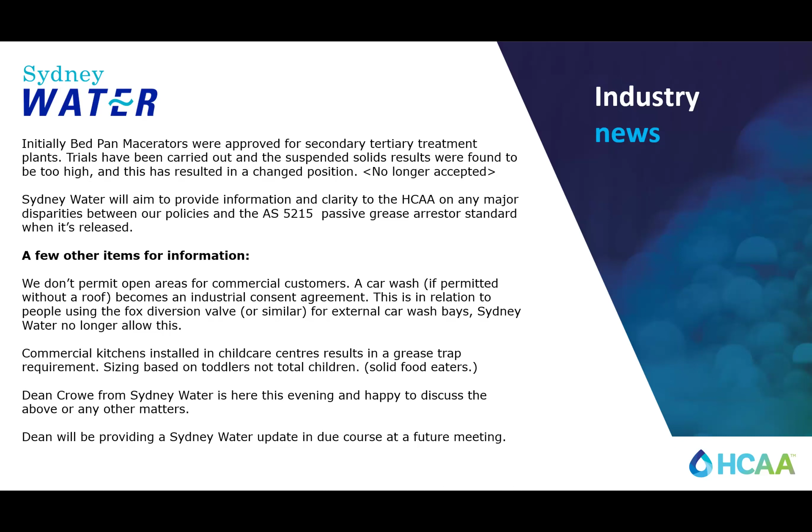Sydney Water are going to do a presentation, probably the next one - that's right, yeah. So watch this space, and you're here tonight as well to talk about it, so if anyone's got concerns, just jump across there.

Brendan's going to do a bit of a presentation tonight on the water demand calculator, but we just want to quickly touch upon this so everyone knows. We've got 4 water meters installed in the cold water service for apartment blocks, and that's been running for 4 years. We've also got 1 hot water meter, and that's been running for 1 year. What we're going to do is just complete that project.

We're going to buy 3 more meters and install them in the remaining apartments, leave them for 4 weeks to get that data, and that will complete the project. Then Brendan can take all that away and we'll publish what we're going to do there. That's in July, and it'll run for 4 weeks. Then in August, we're going to relocate all of those 8 meters to 4 hospitals - that's the next part of the project. So it's just getting bigger and better, and we're going to get real-time data on that. Just wanted to share those thoughts.

Tonight, well, not right now, but in about 20 minutes - ICC has a live event with speakers from Australia, Germany, New Zealand, and the United States. One of the speakers, Tom, is incidentally in Canada, to make things even more complicated. They're going to be talking about pretty much all the stuff we've been doing about global pipe sizing and what happens in different countries. It'll be very interesting, but it clashes with tonight, so I don't think anybody will be tuning in for that. But I imagine it'll be recorded, so we'll send a link out to that after.

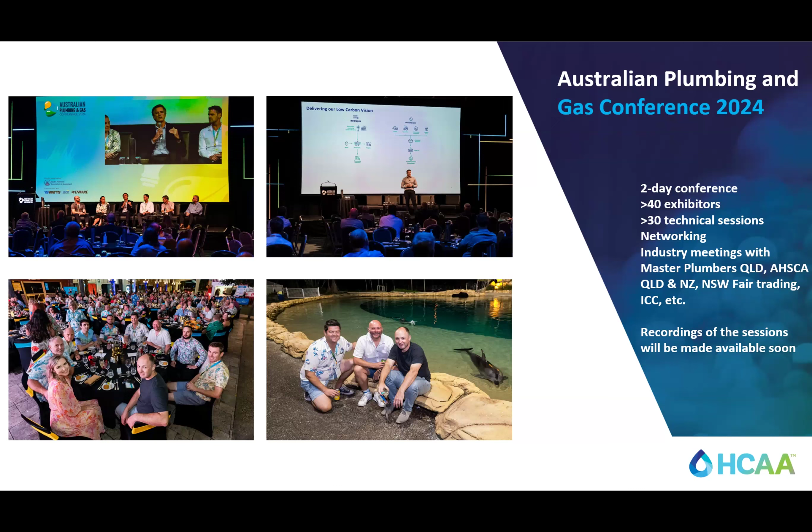We're not going to hold a meeting in May in Sydney, but we will hold meetings in Tassie, South Australia, and Canberra. But we're going to concentrate on this meeting.

It's going to be a celebration of our 5 years as the HCAA, and 50 years as an organisation. We're holding it down at the Cruise Bar, right where the terminal is, where the big cruise ships come up, on the corner of the rocks and Circular Quay. It's a fabulous place - Stephen, Matt, and Em's done a fabulous job organising that, so maybe give them a round of applause.

That evening itself will be just a bit of fun. There's going to be a band, fingers crossed, that's locked in - I think I saw them walking in earlier. That's going to be happening.

We're also going to do a couple of awards - some fun awards, but also some real-time awards about people and projects. It's all about celebrating. We used to do the rep of the year kind of award, but we want to advance it a bit better and make things more organized. It's going to be pretty good.

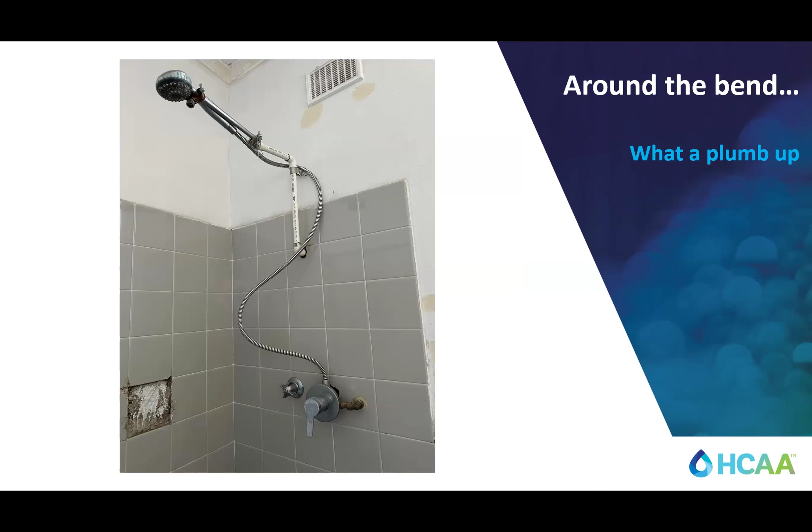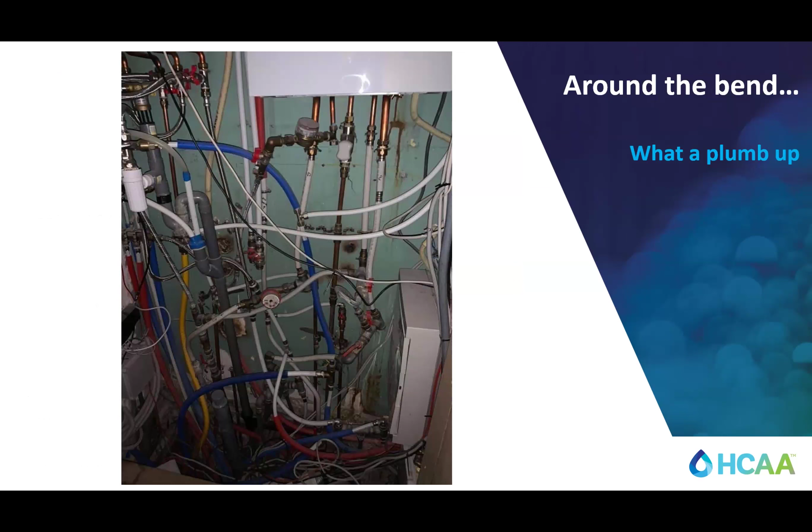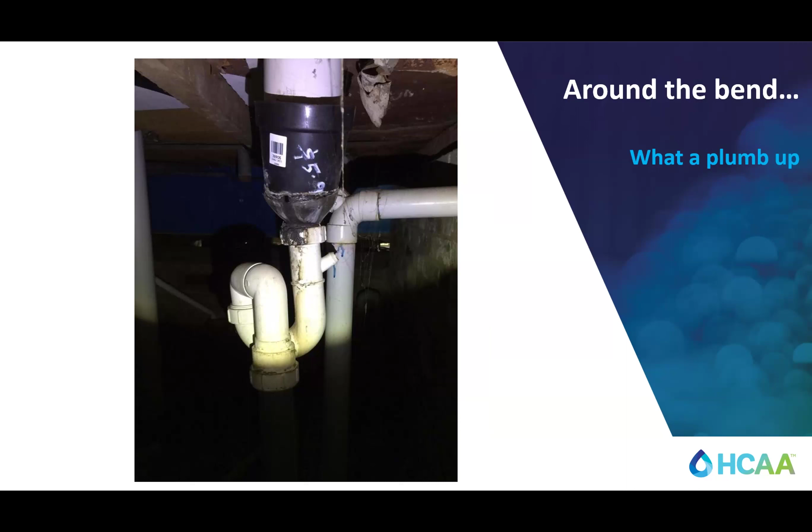Alright, a little bit of fun. We've got a couple of dodgy pictures here. Pretty reasonable, right? What do you reckon? That's a real situation. I've actually seen this quite a few times, I'm sure a lot of people have. It's bizarre, I've no idea what's going on there. How do you even use that, right?

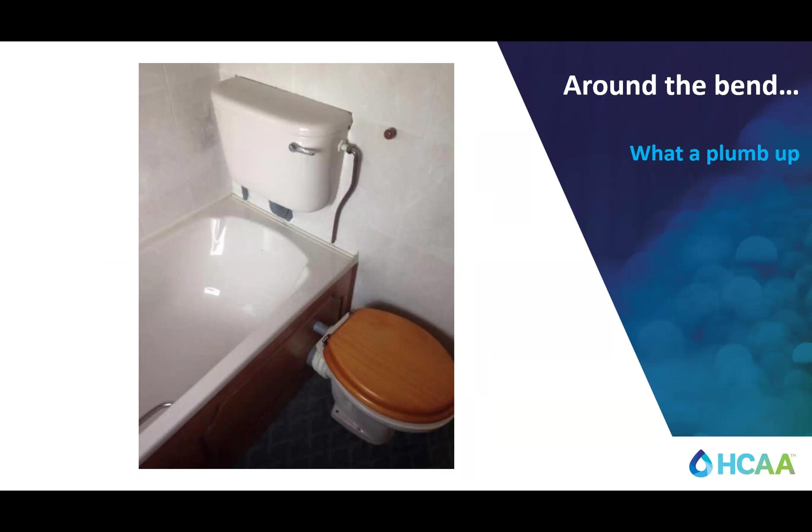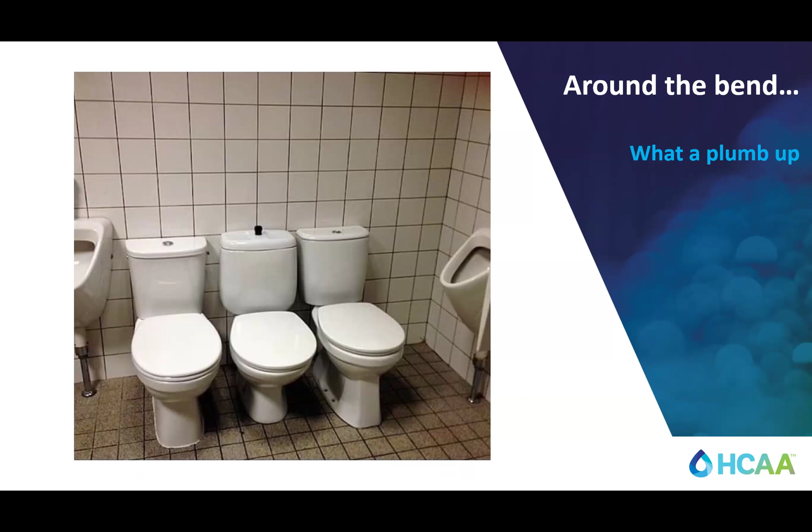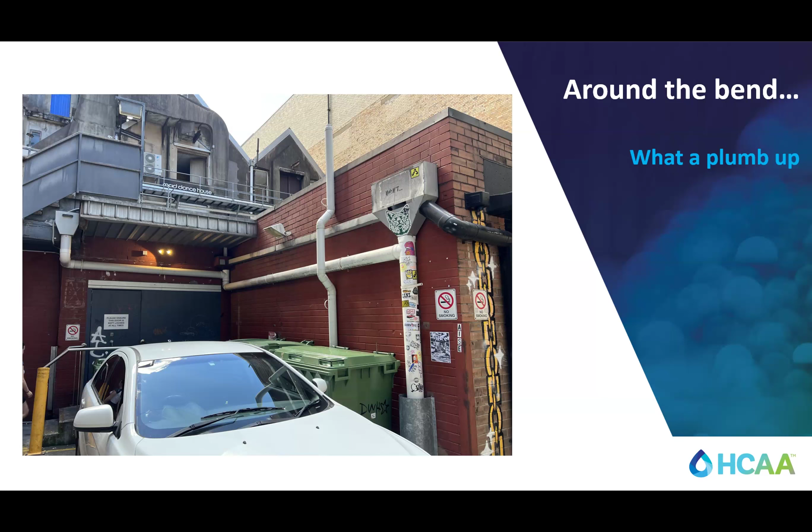It's mental, isn't it? Alright, that's the end of the committee report.

Everyone's had their first meal, yeah? Alright, we're going to get everyone on their feet - it wouldn't be an HCAA meeting without heads or tails. Everyone get on their feet please, we'll rattle through this, we've got a couple of prizes so you can select. How do you pronounce this - a compendium. Your life is not complete unless you've got a compendium, this is an HCAA compendium special. Alright, true or false, it's heads or tails, everyone knows how to play. No cheating - if anyone's still sitting after this, it's going to be ridiculous.

The HCAA president, Paul Angus, who's me, began his career as a plumber. True or false? Heads is true, tails is false. Is that a trick question? It's true, I said it at the start.

Alright, the most recognized video game character in the world is a plumber. True or false? It's true, it's Nintendo's Mario. Is anyone sitting down? We're good.

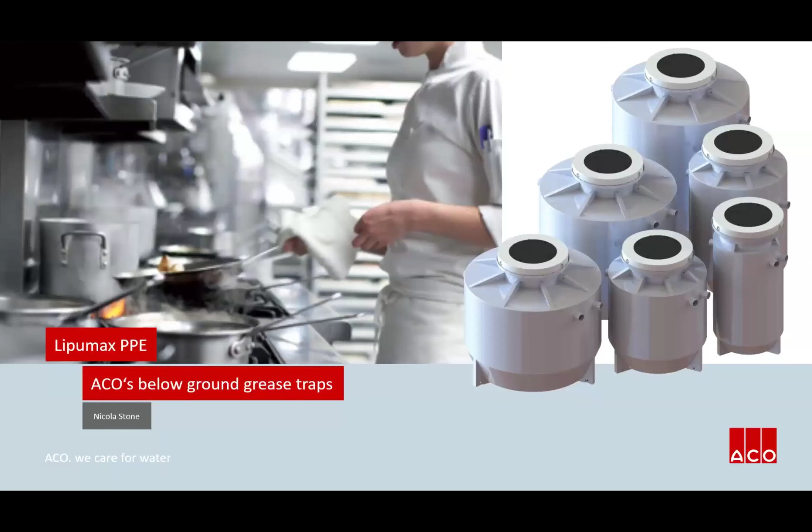Okay, you work this, yeah? Use this or not? Thank you, thank you. Hello, everyone. Just to quickly introduce myself, I'm Nicola from ACO.

I have taken over, I know most of you would know Kate Jennings, her role. As was said earlier, she has had her baby girl last week, so congratulations to Kate. I have worked with ACO over the last 2 years in an internal role, and now I'm out and about taking over Kate's area while she is on maternity leave.

So today I'm here to talk to you about ACO's below ground grease separators. Let's get into it. I'm going to keep this nice, short and sweet. It's only 5 minutes, we don't have time for questions, so I have placed my information on the last slide.

If you have any questions, feel free to take a photo and we can go back to it later. So in 2014, ACO released our grease traps, above ground and below ground, they were a European product. They were quite popular thanks to the specifications from our hydraulic consultants and our key clients. They were popular because of their cylindrical shape, which fitted quite well when you have restricted areas within your project, in comparison to the traditional shape. It was a great success for us, and it was something that was growing within our company.

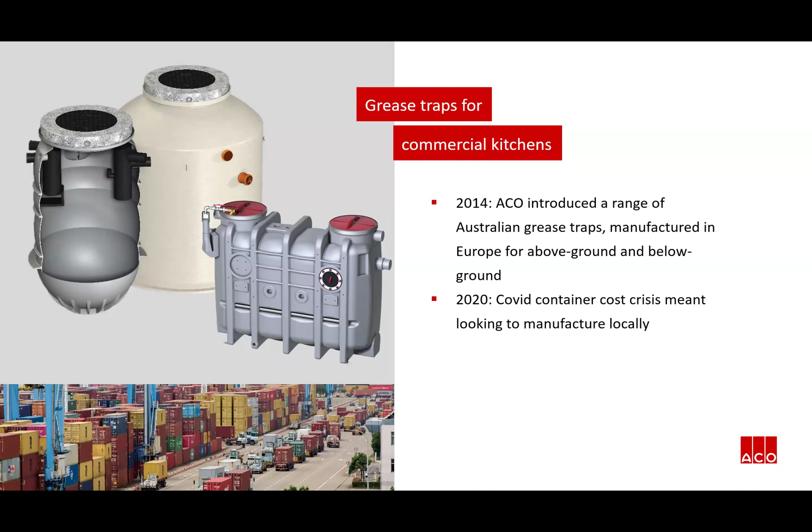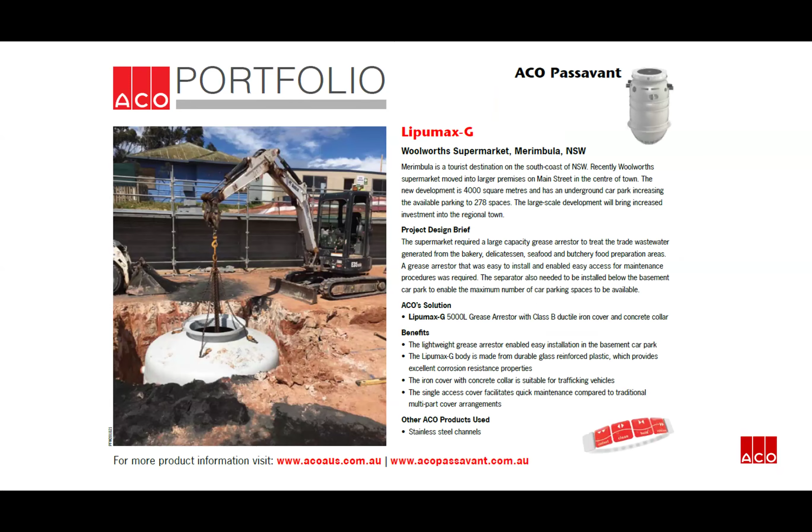So it was quite a successful product for us, and we wanted to keep growing on that. But as we said, unfortunately with COVID, this was something we had to come up with a solution for, and it was already in the works.

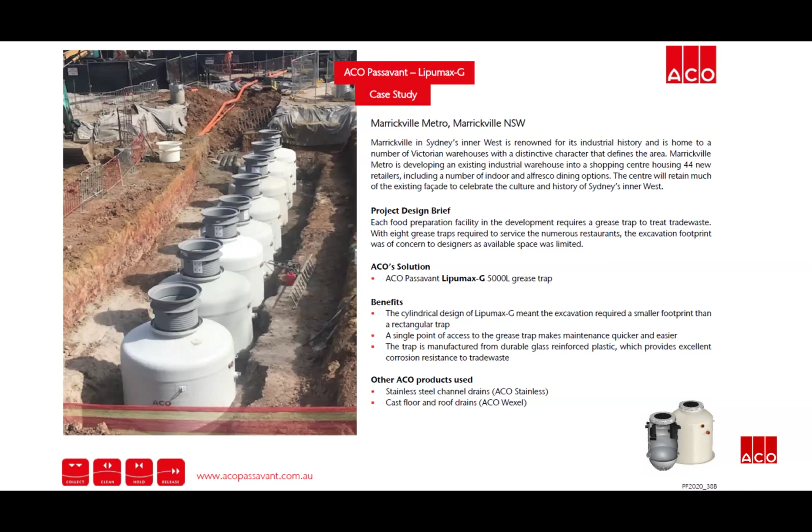So as of this year, we have released our new grease traps. It is locally manufactured in Emu Plains, made from corrosion-resistant polypropylene. They are still the cylindrical shapes that some of you know and love, and available now if you wanted to start specifying that within your project. They come in a range of sizes, starting from 1,000 litres, working all the way up to 5,000 litres, and they do come with risers and access covers as well.

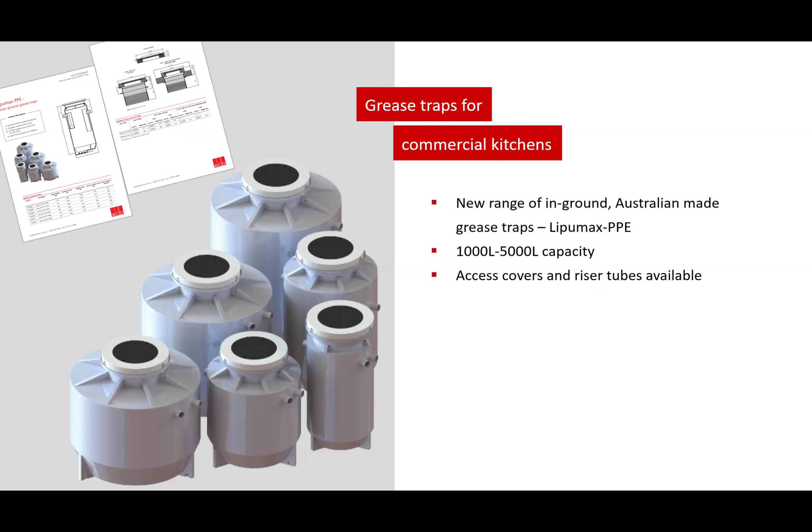As these are just released, we are in the process of updating our website. If anyone has any questions, my details will be on the screen, so feel free to contact me. We're organising and updating our website with all of our specification sheets, as well as Revit files for you to access and put on your specifications.

And as we know, the new standard AS 5215 will be released some point earlier this year. So as this is released, we will double check and make sure everything is up to standards and working towards what's required. As the actual standard is released, we will double check and make sure everything is up to scratch and as per the standard.

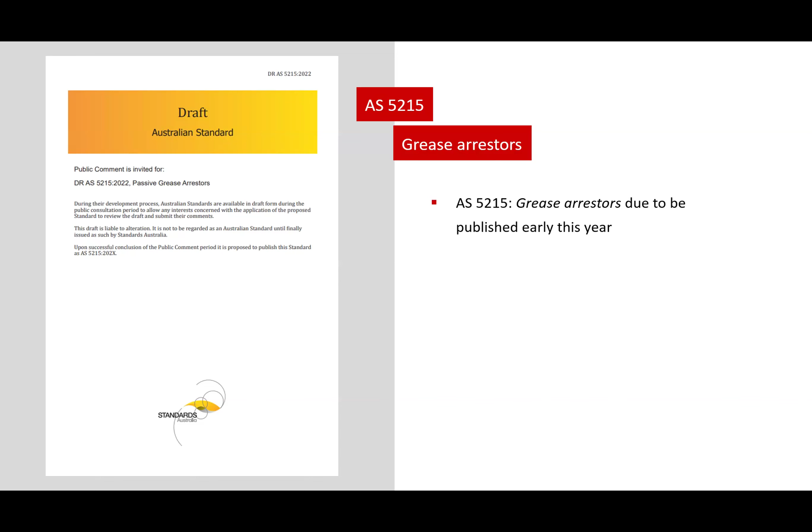This is all Sydney Water approved as well. So if that's something you want to look at specifying on your project, please feel free to contact me and I can send additional information. Unfortunately, there's no time for questions, but feel free to take a photo or get in contact with me, and I will happily chat or talk to you about these grease separators. Thank you.

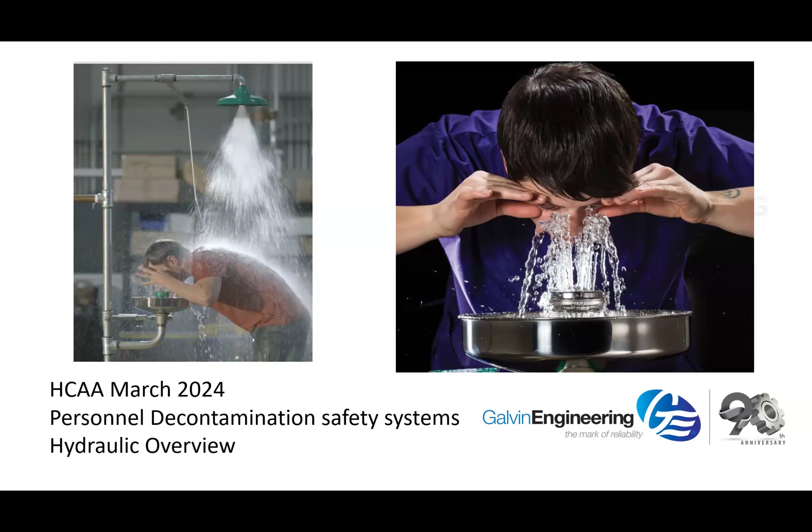So we'll look at that. Then we're going to look at floor waste in regards to safety showers and eye washes, and where they're located within the actual laboratory. And then we're going to look at tempered water as well, and where that's used, and probably a way around actually tempering the water for safety showers and eye washes.

I'll just flick to this. So the actual WaterMark complement serves a specific purpose within the broader context of product certification. It aims to facilitate product certification in compliance with the Plumbing Code of Australia. By issuing the WaterMark complement to the ABCB, it's essentially providing additional specification or criteria that need to be met for products falling under AS 4775 to obtain certification. This certification ensures that the emergency shower, eye wash, and eye face wash equipment meet the required standards and can be legally installed in accordance with the Plumbing Code of Australia.

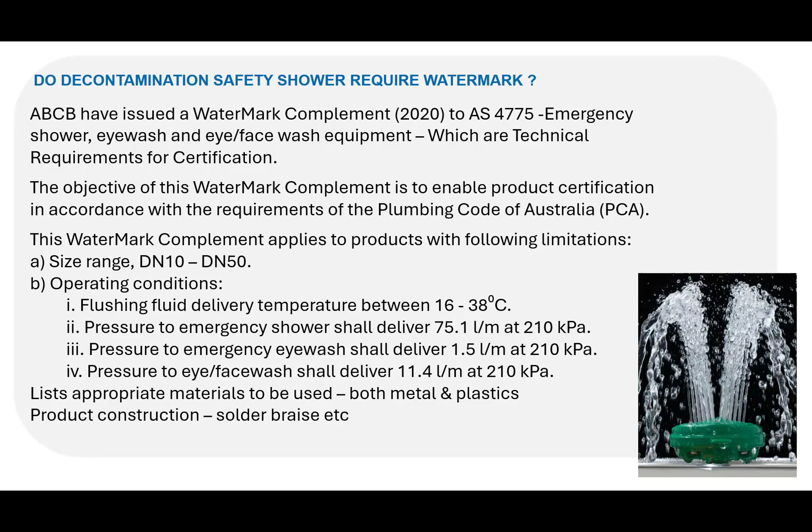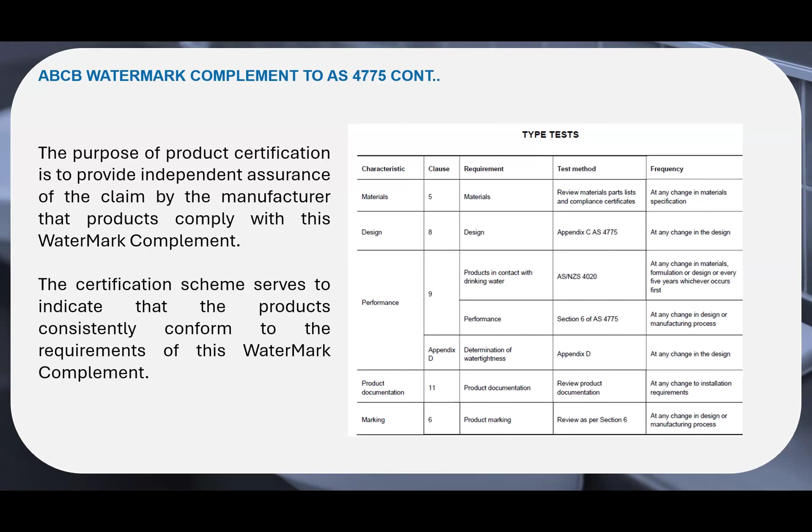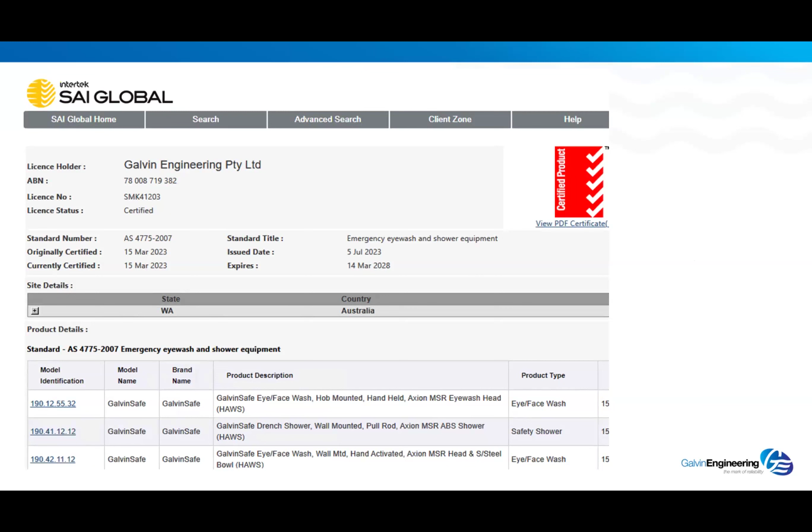So we move over, and like Nicola, we've only got 5 minutes, so there's only a couple more slides to go. But can you do a safety decon shower and need a floor waste? Well, the simple answer is no, it doesn't. But there are instances where you do use a floor waste. If you're doing a government school or high school, they will request a floor waste, because the kids can actually just pull it down and flood the lab whenever they want if they get in there. So a floor waste can be installed there.

But it's always relevant for the contractor to meet with the EPA and just say, do we need a contamination pit or not? More than likely at a high school you won't, because they're not going to have biochemicals or dangerous chemicals within that school. More your PC2, 3 and 4 labs, you would look to the EPA and if they want a waste there, say we need a decontamination pit. Let's put one in, and then it's up to you guys to put that in your plumbing design accordingly, because we don't want dangerous chemicals going to the wastewater system.

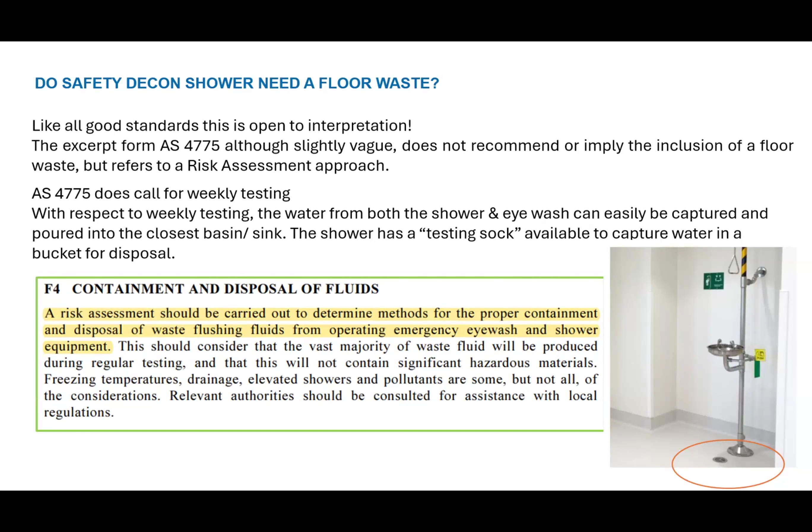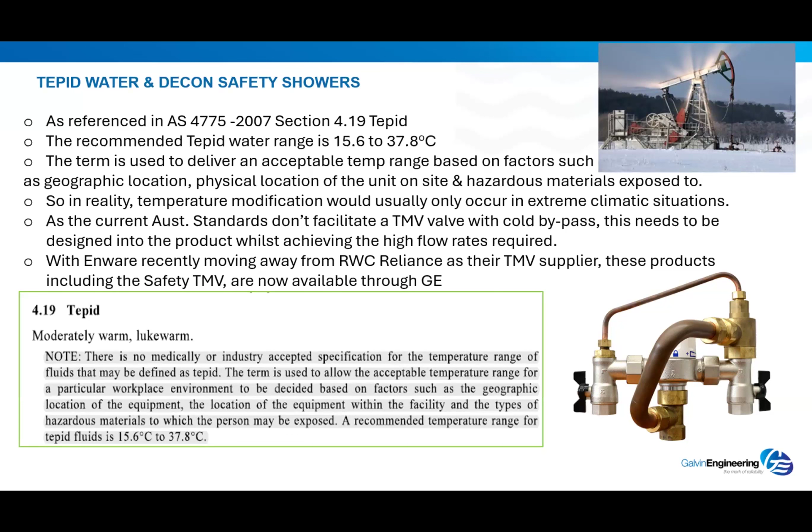So safety showers and eye washes that are installed outside, for instance ambulance bays, open to the climate - if they're installed in snow climates where it's very cold, you can get shock from the cold. Even worse, if you've got a hot temperature, say in Darwin, where the temperature could be up high and you're treating someone with a burn, it's going to exacerbate that injury. So one way around that is to use a safety TMV that has a high flow, and you can adjust the water temperature accordingly to meet that optimum temperature. That optimum range in the standard has been tested to be a safe temperature to wash your eyes and decontaminate.

Stay open valve is a critical part - it's actually named in there as critical. Obviously you've got to have water charged to the actual shower and safety eye wash at all times. If there's an emergency, you need to have water to the actual unit. That's why there's no isolation within reach of the inlet supply, because we don't want to isolate the water from the safety shower and eye wash within reach of people who could turn it off without the knowledge of others, because it's got to be charged at all times. So we don't want that.

The other important one is the obstruction - it must be within line. Obviously, that's common sense - you don't put a safety shower and eye wash in an obstructed area, so you need to be able to get to it quickly. And obviously the flow is important for you guys - the minimum flow rate is 75.7, so that's the actual minimum, not a maximum, on a 25 millimetre potable supply of water. That's been tested to say that 75 litres per minute is just enough water to decontaminate the body in one big fell swoop, and that's why it's at that standard. And obviously the location is very important.

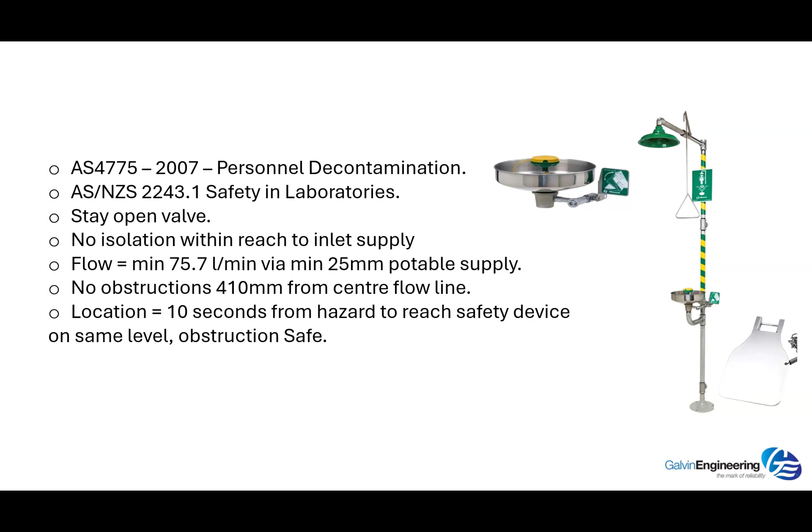I was there for a completely different reason and thought, why the hell is it out there? It's miles away—more than 10 seconds away from where it needs to be used. It's got to be in that position—if you've got something in your eye or chemicals on you, you need to be flushed straight away. So it's important to talk to the architect, because if they're not used to doing schools, they'll want to hide it in a corner or put it in a cupboard somewhere.

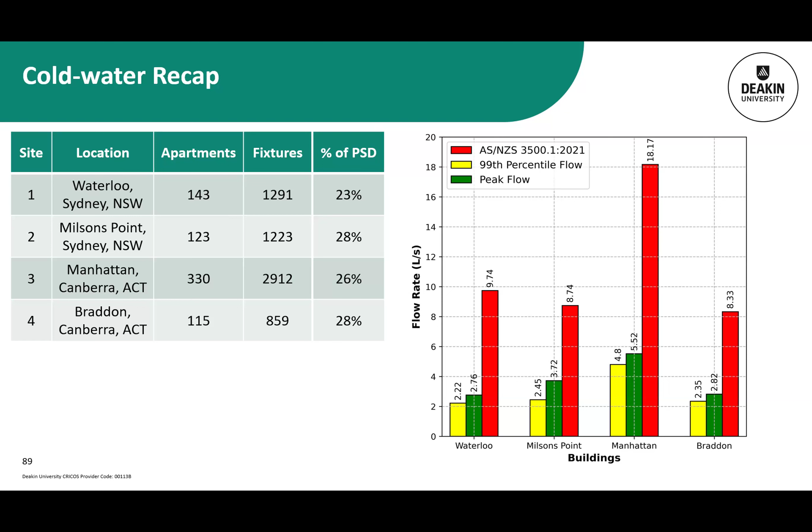For anyone interested, the occupancy levels are around 85 to 90% at the time of monitoring. There's only one building, Braddon, where we couldn't confirm the occupancy, but we believe occupancy levels were pretty high in these buildings, so it was pretty normal water use.

To sum it up, the Australian standard overestimates cold water demands in the residential space by about 3.5 to 4.5 times. To put that into perspective, for 3 of the sites you could go from a 100 mil pipe down to a 40 mil pipe servicing the mains, and for the Manhattan site you could go to a 50 mil pipe.

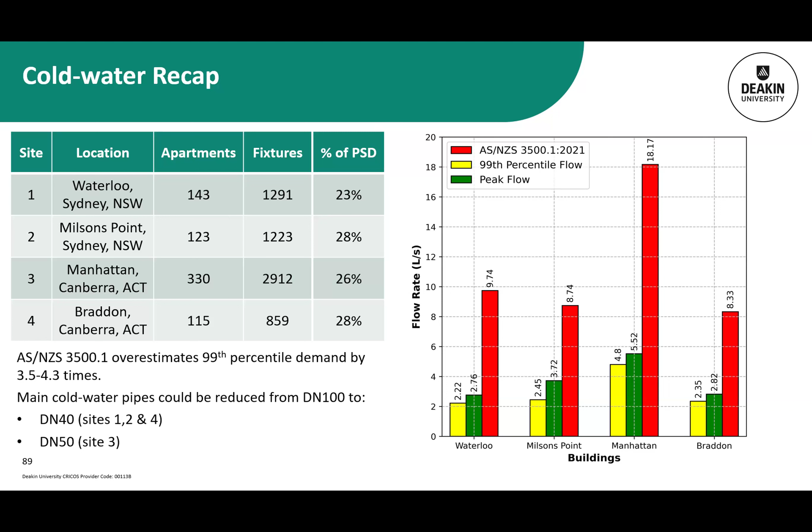So for those maybe not in tune with the implications of oversizing, the obvious one is cost. There's a pretty big opportunity there from a pipe material and embodied energy perspective.

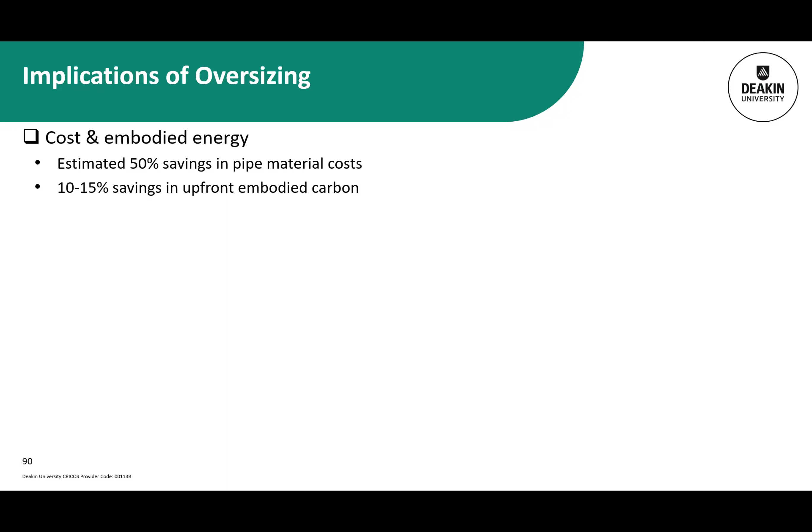The oversizing will also contribute to some elevated energy consumption, particularly around heat loss. A larger pipe in a heated water system typically has more heat loss. You may argue that circulatory systems cover that heat loss anyway, just through the flow rate, but there still seems to be some evidence at this point in time that a smaller system will still not lose as much.

As we're going further down the line of the research, pump inefficiencies are a huge impactor in terms of the oversized system. Can't release anything just yet, still doing some analysis, but I think it'll be pretty shocking to see after we've crunched the numbers—there's a big gap there from a pump performance perspective.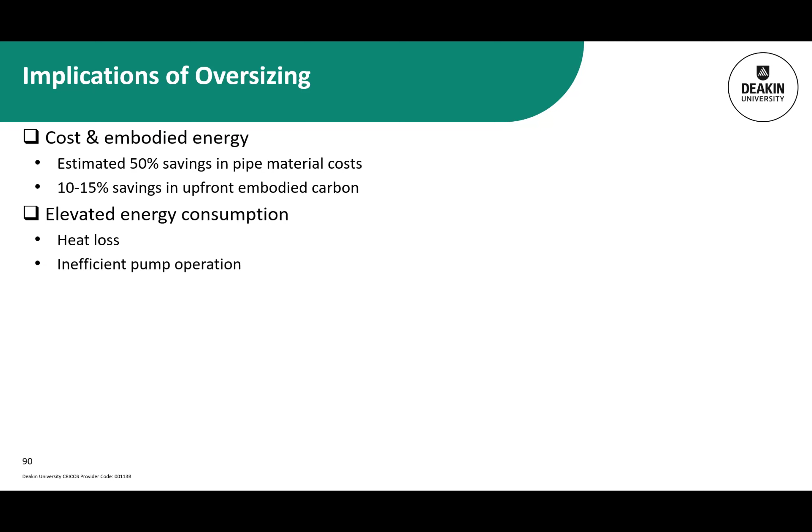The other thing too, we've got potential for reduced water quality and increased water age. Because we have larger pipes, they maintain or hold a larger volume of water, so it takes longer, or more water, to flush that pipe completely.

Just bear in mind that that's the relative water age, assuming it's 0 hours old entering the building, so it could already be 24, 48, 72 hours old when it enters, meaning the actual percentage isn't as big of an increase. But when we look at the relative water age, there's a pretty big opportunity there to reduce that.

The other thing too, in terms of self-cleansing and promoting better water quality through the network, is suspended solids and having enough frictional force on the pipe wall. If we have oversized pipes, we can't generate enough force at the pipe wall to move these solids along throughout the system. This is also the same for any buildup of entrained air - we need a certain amount of velocity to promote that movement, for horizontal pipes at least.

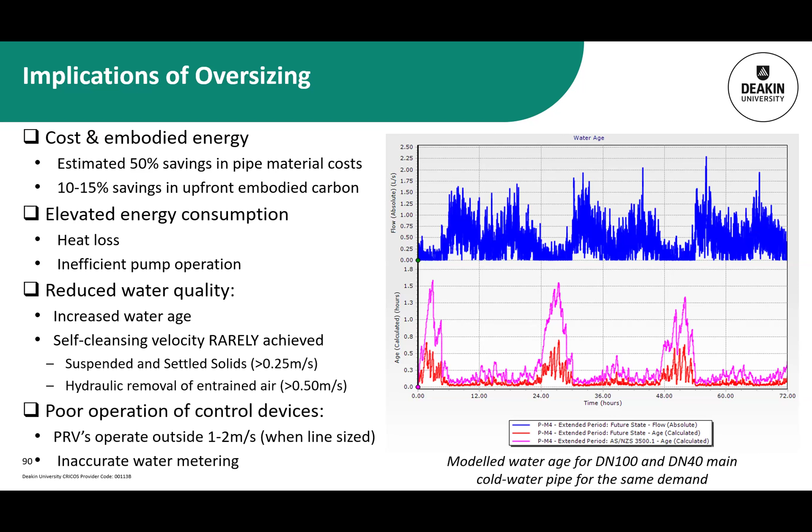For any valve guys or women in the room, we know that generally they like to operate within an intended range or design range, and at the moment they don't get there, or they never actually operate in their intended range, which promotes poor performance.

We're also looking on the flip side for unintended consequences - we fix one problem, but what happens if we reduce the size? Do we introduce new ones? At the moment our pipes may be at the right size we're designing to, so our actual velocities are operating at the intended rate, and now they're elevated. So we may need further consideration going forward for noise, where previously this wasn't really a thing because it was always masked by the oversizing.

Similar again for erosion corrosion - why there's always that consideration in a design. It's always been masked by oversized systems, so it may not be as prevalent, or it may show its face in a different form.

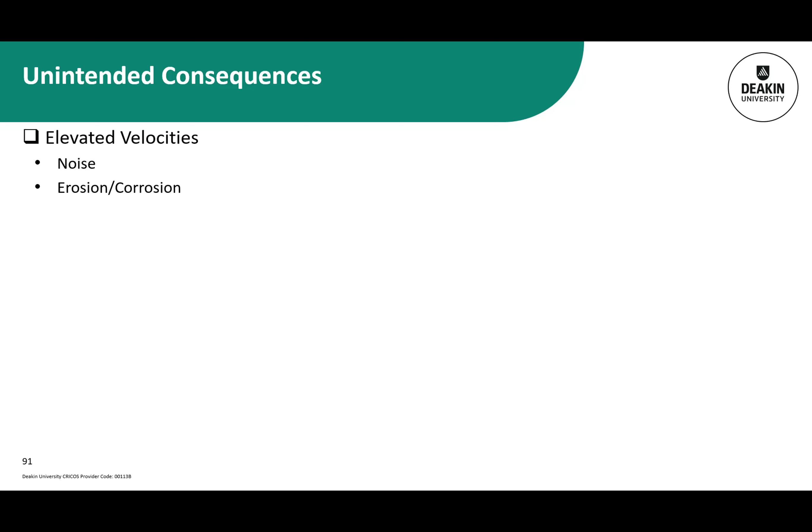The other one too is the potential for elevated pump energy. This slide's a little bit outdated based on my new understanding - when you go to a smaller pipe, you will increase the head loss throughout your system. But the work we've been looking at so far tends to show there are far more opportunities gained by going down a pipe size and selecting the right size pump, which will offset any increase to head loss throughout your system.

The biggest one will be that you might see greater pressure drops through your water service lines, and you need to be mindful of what might happen at peak times - say for comfort of showers or specific fixtures - when you need to maintain a certain performance standard, whether it's pressure or flow.

And on the flip side, a smaller pipe will see greater variation in pressure loss, so your system will fluctuate from its peak to low pressure over a much larger range. So there may be some implications for fatigue, expanding and contracting, particularly around plastic pipes and those sort of systems - things to maybe keep in mind.

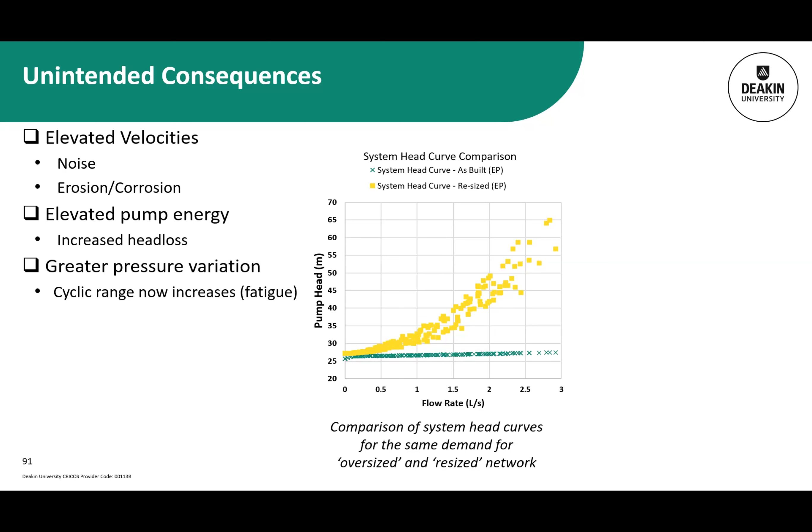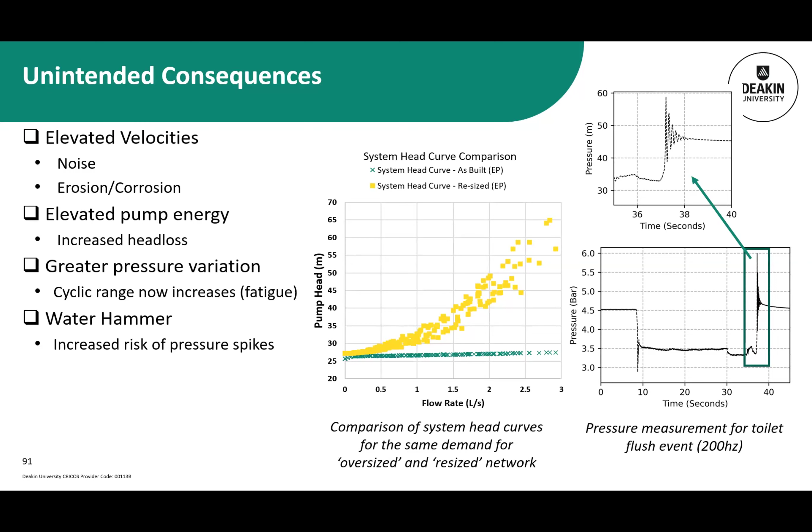On the secondary part of the water demand project, as Paul mentioned earlier, we'd purchased a hot water meter as well to go on one of the buildings. So we've got a cold water and a hot water meter on a Milsons Point building just around the corner here, with 123 apartments, and we're monitoring the two simultaneously to try and determine the relationship when the peak flows between cold and hot line up.

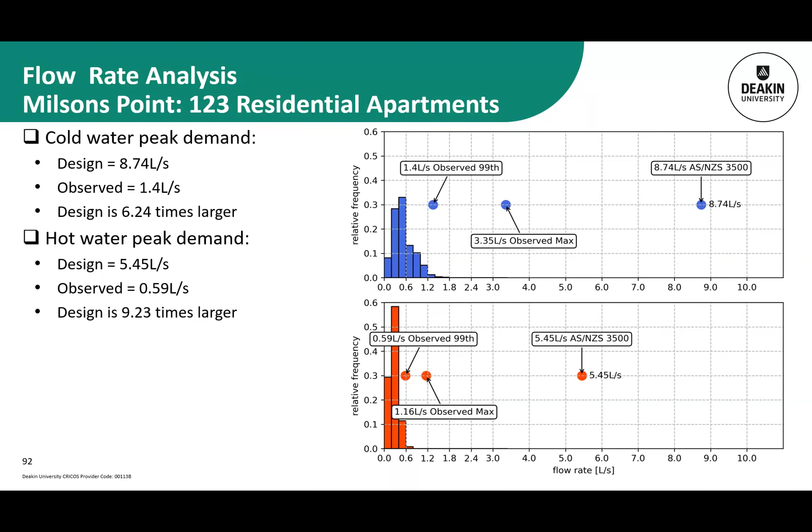And then if we break it down further into a bar chart of the relative frequency of actual flow rates, separated into increments of 0.2 litres per second, you can see predominantly these buildings spend a lot of time at a low flow, and a peak rarely occurs. This really further highlights the implications of oversizing - that there's some room there to not only reduce the size, but maybe rethink how we design our systems.

Just to reiterate, the average flow rate for the cold water is 0.5 litres per second, and for the hot water, that's 0.27. I should preface, on the hot water, I've taken the circulatory rate out, which is probably about 0.2 litres per second for this building, just to normalise and get the true demand from the building.

So that's a bit of a wrap up from the water demand side of things. As Paul mentioned, we've gone and purchased some more meters, so for the rest of the buildings that have cold water, we'll slap on some hot water meters and get the data to wrap that up.

We've got a lot of water use data which consultants can potentially use for performance solutions or evidence. If anyone wants further insights, there are some papers on it, but also feel free to get in contact. I can give you some spreadsheets or simple charts and help out with that.

Once the residential side of things is ticked off, as Paul mentioned, we'll be moving into the hospital space.

So I guess the other thing is a call to arms. If anybody knows of a potential place that might allow us access to put meters on, or might be interested, you could pitch it to them. It might be interesting to understand their water usage, where they might be consuming too much energy or something like that - there's some insights we can pull from there. So it's a 'we'll scratch your back' sort of scenario.

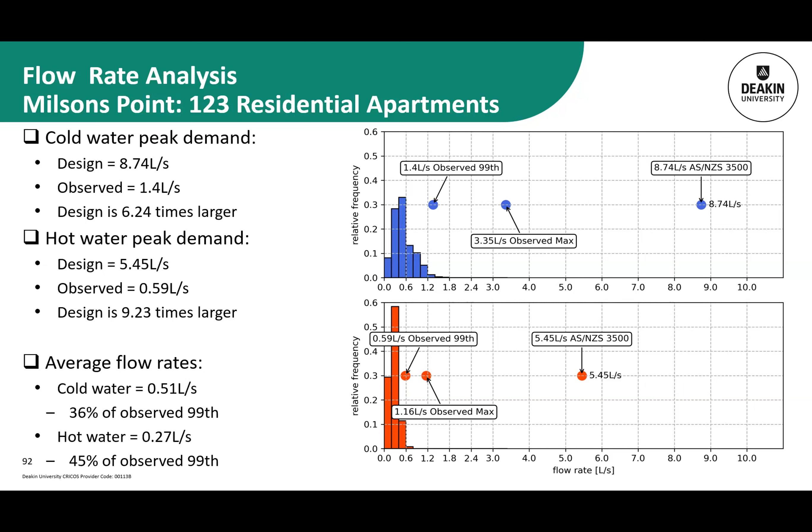We now have the residential cold water 99th percentile demand calculator. This is the first step into solving the overestimation problem in the residential space.

There's the link there, and also if you scan the QR code - I'm not sure if we'll get a copy or this will be sent out to members, but I think there was an email probably a month or two ago with a link, if anyone hasn't been there to check it out and have a play around.

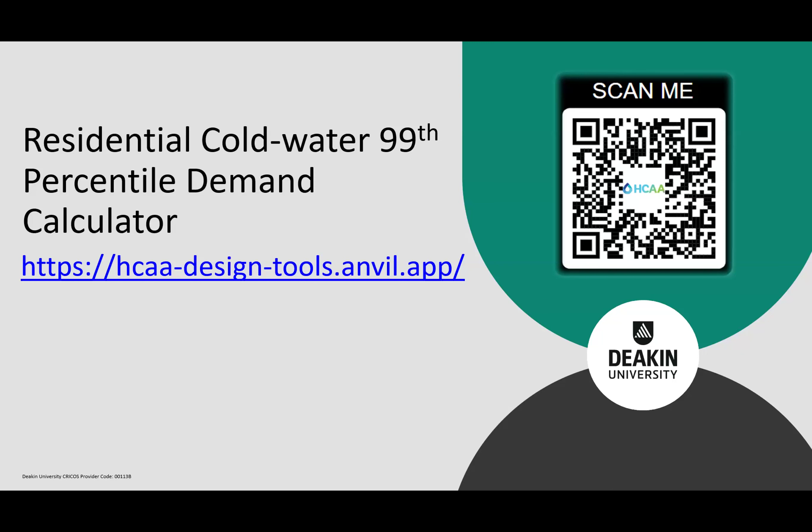So we'll jump into some scary maths. This is the basis of what happens, and this is why we developed the calculator, because it takes away all the thinking for you guys. You can basically just come up, punch some numbers in, and it'll spit out the answer for you. But I'll give you some insight so that when you go to someone, you can pretend you know what you're saying.

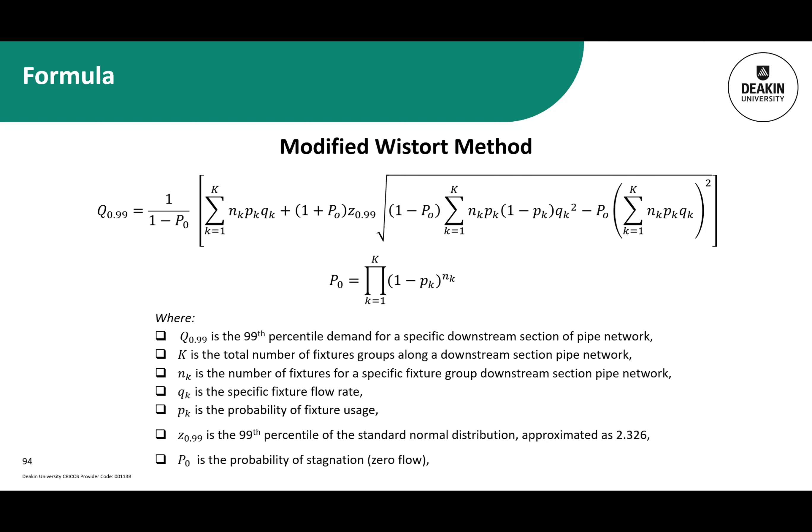Really, there are only three main parameters you care about: the number of fixtures, the flow rate for each fixture, and the probability of use, or how frequently it will be used during the peak hour of water consumption.

The benefits of this formula, outside of say the loading units approach, is that it's internationally recognized - this same formula actually features in IAPMO's water demand calculator. So it's got a track record, a few runs on the board already. It's got tangible parameters, so there's no magical wishy-washy fixture or loading units rated off another fixture and then compounding that - it takes in physical parameters for each fixture.

It also considers low use or stagnation. When you have smaller buildings, you spend a lot of time at intermittent or no flow, so this formula actually has a provision for that too. It doesn't just assume you're always wanting to use water - there is a point in time where your building actually doesn't use any water.

It's also able to capture the variation in different fixture use characteristics. During your peak hour for a residential space, your shower will have the lay of the land and take up most of the water consumption. For those who look at the formulas and the values the calculator spits out, they'll realize these probability values are higher for those fixtures, whereas things like the dishwasher in the morning may not be used as prevalently, so it's tucked away and has less impact on the actual load on the system.

The other upside is this has flexibility, so it's a good foundation to be applied to other building types, or if things change over time and new technologies develop, it makes it much easier to adapt once data becomes available on the usage characteristics.

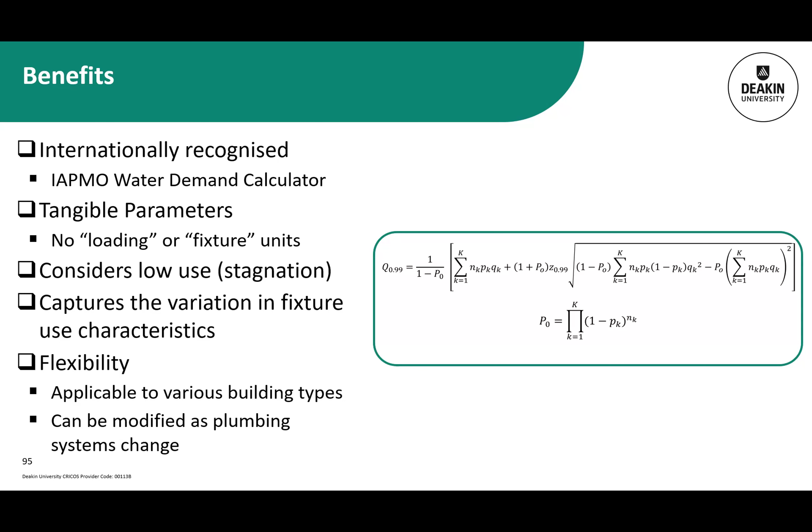So as I mentioned before, there's three key parameters. Two are easy - it's basically summing up how many fixtures you have and understanding the flow rate of said fixtures. The hard one can be the probability of fixture use.

It has some funny nuances. Because of the increased randomness of water use, as your building grows, the actual probability of use decreases - you're less likely to have people synchronized at once using the water. But the amount of people you have in your building also impacts that, causing it to go up or down. So the probability formulas were developed keeping these two considerations in mind: your building size and how many occupants are actually in the building.

So as an example, for the chart there, we can see at the bottom that's the probability of use for a shower, assuming one occupant per apartment. But we can see that elevated line is the probability of usage for a shower, considering if there was 4 people per apartment. So it elevates and goes up on a scale based on the number of apartments and people.

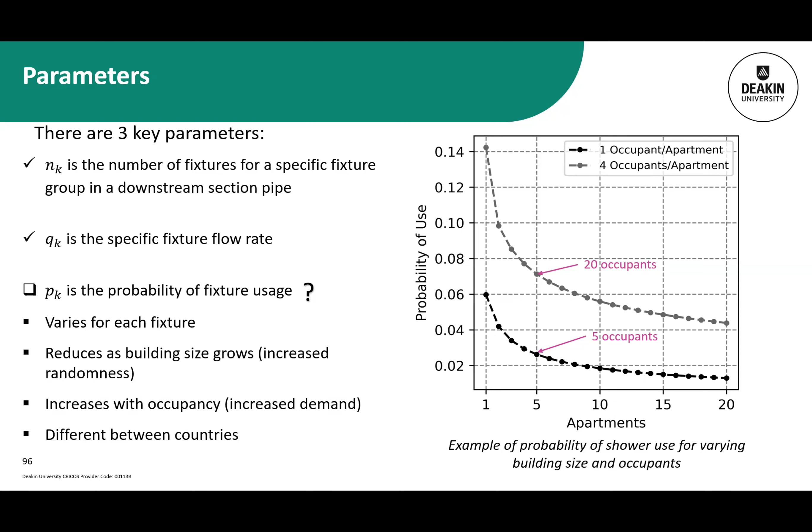So a little bit of a breakdown on the formulas. There's 2 steps, as you might have guessed. The first one is to determine the baseline probability - that just considers what it would be for one person per apartment, and it just follows the bottom line, until you get to the intersect point of, okay, we've got 5 apartments, here's our baseline. And then we look at how much do we need to increase this to compensate for how many people are actually in the building?

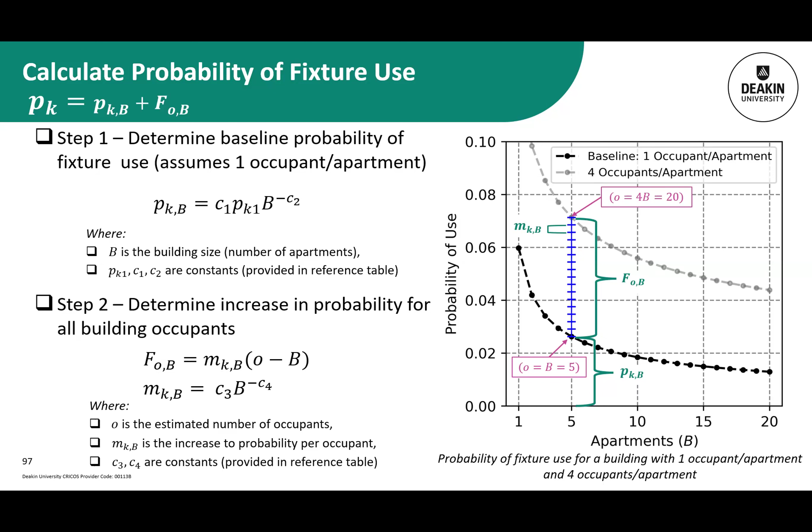So that's where the occupancy comes in. And then for each occupant, you can see that step up the ladder - that amounts to the probability, and you'll see why this changes. That's a nuanced relationship, it's not a fixed relationship in terms of building size and occupancy. In the next slide, you'll see what happens once we go back.

I'll get there eventually. But to go through how we determined the probability values.

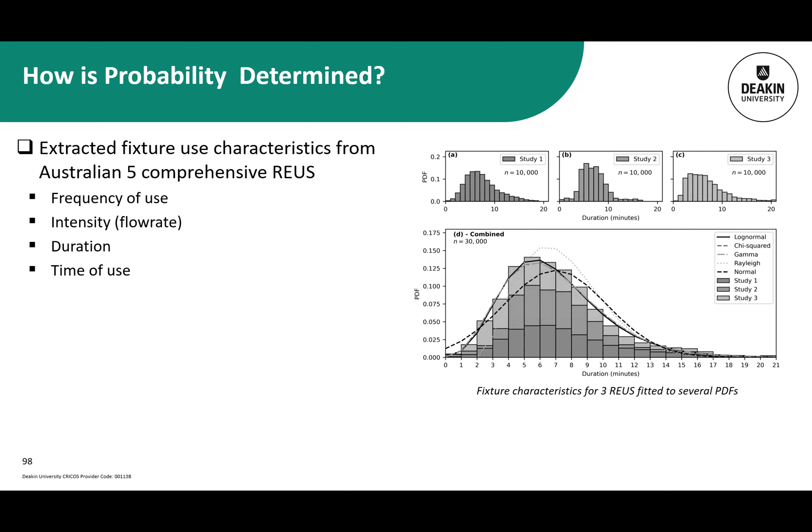So we've gone through and looked at Australian residential end use studies. We've taken data from Australian homes, the 5 most comprehensive across the country from 2012 to 2018. We've looked at the frequency of use for each fixture, the intensity or flow rate they impose, the duration, and the time of use throughout the day. Then we've compiled them all together to develop relationships that can be represented as a probability or distribution.

And then they're put into these characteristics, then put into our water demand model that we've developed. It considers X amount of apartments within a building. For each user, we simulate how many times they might shower in the day, how many times they might use a tap or go to the toilet. After X amount of simulations, we come to our figures, and we've developed the formula based on the statistical analysis.

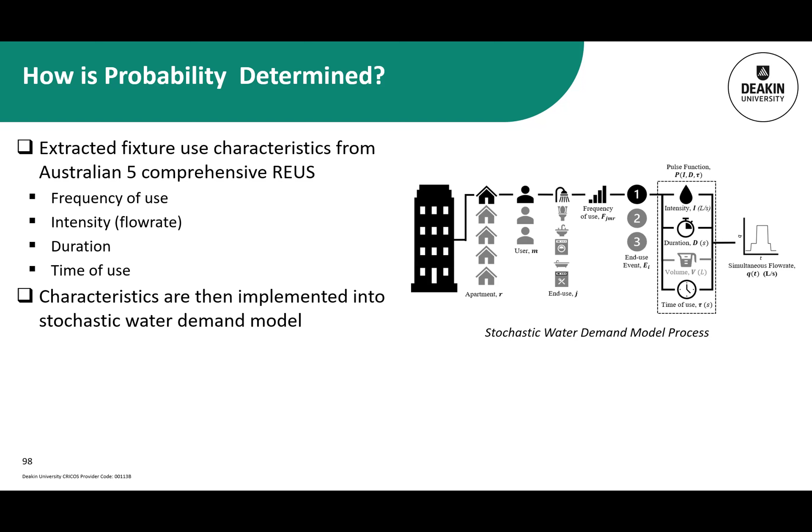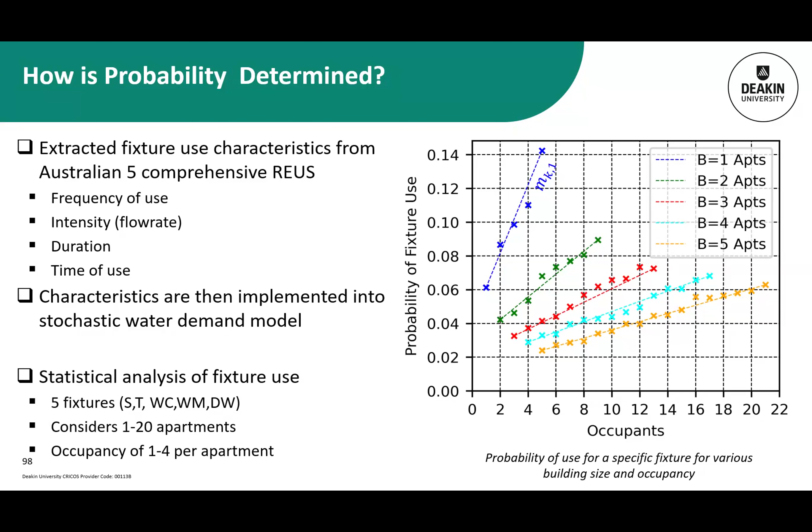To come full circle back to the calculator and its performance - we've benchmarked it against the buildings that we've been monitoring for the last couple of years. So we've put there what we call the verification method, and we've compared it to Barry Smith's book as well as the Australian Standard.

We can see the blue and the green - the blue is what we're trying to aim to, and the green's where we're at. We can see we're working our way up, and we've got a little bit of room there to play with in terms of estimating the 99th percentile for these 4 buildings. So we've got pretty good performance coming down to what we've observed. There's still some room for designers to have confidence and go, okay, we're not going to push the boundaries or thresholds too much at this point in time.

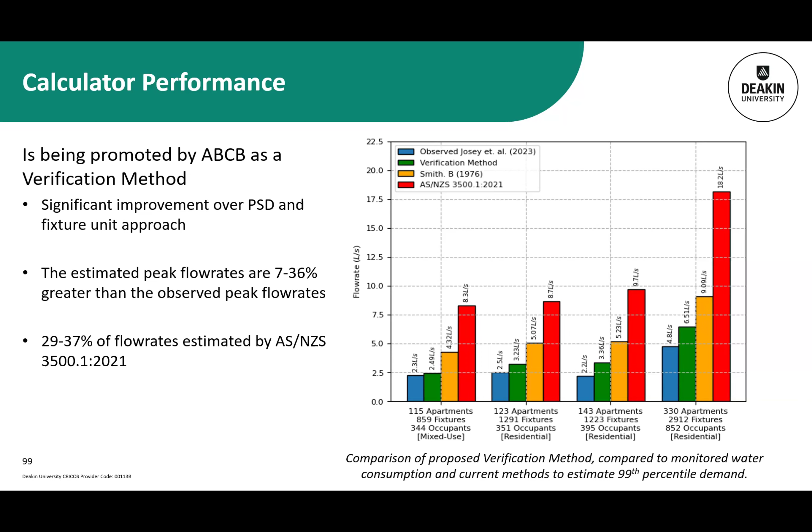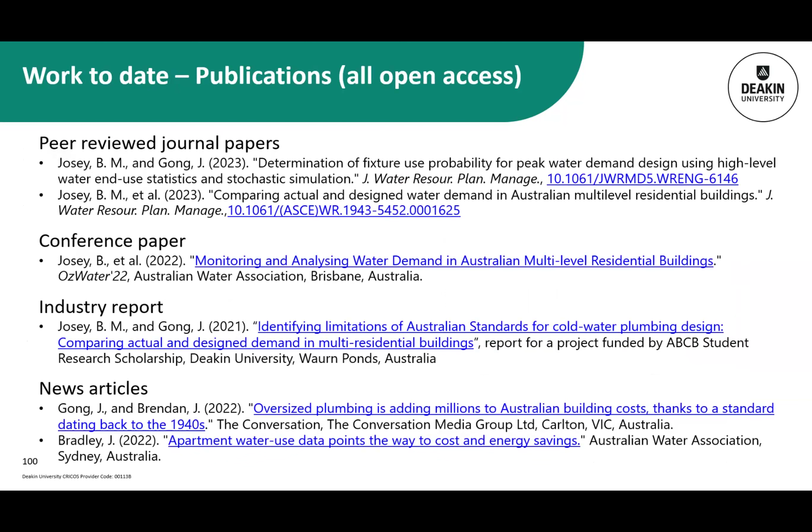So here's just a list of the work we've done to date. Most of this is on the website, the water demand website. So if you want anything there, any questions or want more information, the door's always open. Feel free to send me an email or get in touch with the HCAA inquiries. Em's pretty good at handballing across to me, and we can go from there. That's about it from me. If we've got any questions, feel free to put your hand up, but other than that.

Alrighty, going over.

Thanks for that. So I suppose my question is, the closest we can compare this is to the DIN standard. We notice, like we've done on H2X, that the risers are a lot smaller, but the feed pipes to each unit are bigger. How do your calcs compare to the DIN standard? There's a bit of discrepancy between yourself and the DIN.

In terms of the risers for the HCAA being smaller, but the branch pipes being larger - yeah, correct. That's to do with the relationship of water use and increased randomness. I can't speak to it in too much detail, I haven't gone through and done too many case studies, but that's just the performance or nuance of how this formula works. I know the DIN's done a heap of water monitoring and then fitted some curves, so maybe that's where there's some difference in our methodology. You'll see a higher probability of use at a smaller domain or smaller area, as opposed to a pipe servicing a larger population. So I think that's where you'll see the differences. It's not to say either is wrong or right, it's just the nuance of the actual performance of the formulas themselves.

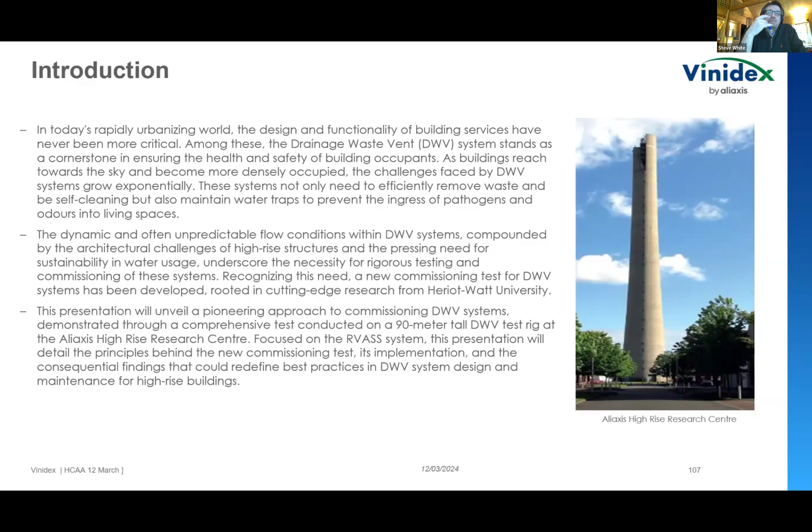One of the things we found in the review is that there isn't a way for a system, once designed and installed, to be properly commissioned. You design it, but how does it actually operate? If there are new systems or innovations, how do you know it's actually going to work once installed? Looking at the Australian standards, I'm told the only contracted test is a hydrostatic pressure test, which only checks for leaks. Essentially, you fill it with water, hold pressure for 5-10 minutes, and make sure the pressure doesn't drop and it's not leaking. But it doesn't give you a performance test of whether the system you're designing actually works.

So what we've done, working from the research with CIBSE in the UK, is work on a technical memorandum for high-rise building drainage, for sizing systems in tall buildings, and that should be published by CIBSE as a technical memorandum for their update of Guide G in the next couple of months.

So it's going to give guidance on designing taller buildings, whichever system you want to design with. It's not specific to one system, but for any DWV system you're thinking of using. What size should you determine for the drainage stack? If you're using secondary venting, what size should that be for tall buildings over 10 stories in height? It goes all the way up to 100 floor buildings and above, so it covers guidance from 10 floors to 100 floors and above.

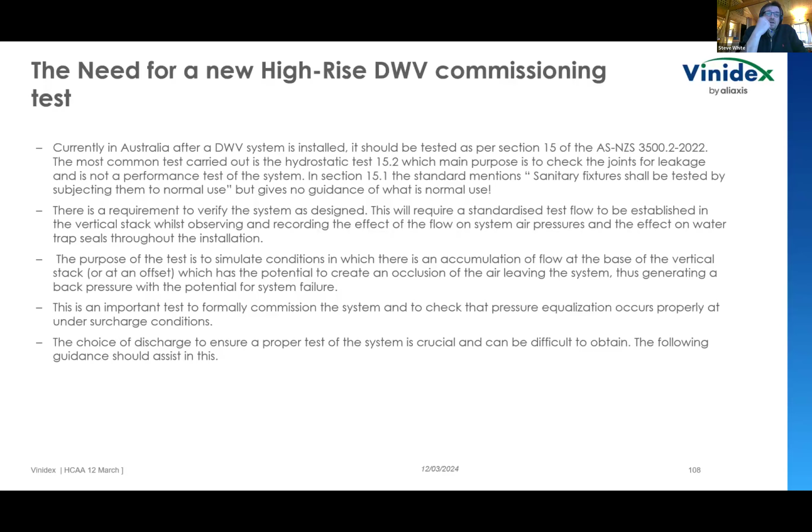When we're looking at doing the system test, we first need to wet the system. You just run a flush because there is a difference in flow between dry pipe and wet pipe. If you do a couple of flushes first, it wets the system up and you get to the true performance of your drainage system through the frictional slip in the system.

We introduce a discharge for 5 showers, just to give a baseline steady state flow rate of continuous flow. Showers are probably the best way of discharging to give you that initial continuous flow rate. But we've got to remember a drainage system is inherently not steady state flow, it's unsteady state flow. So you're never going to understand the drainage system's functionality just by turning on the taps, leaving it running, watching it for 10 minutes and saying that's my system working and that's its pressure.

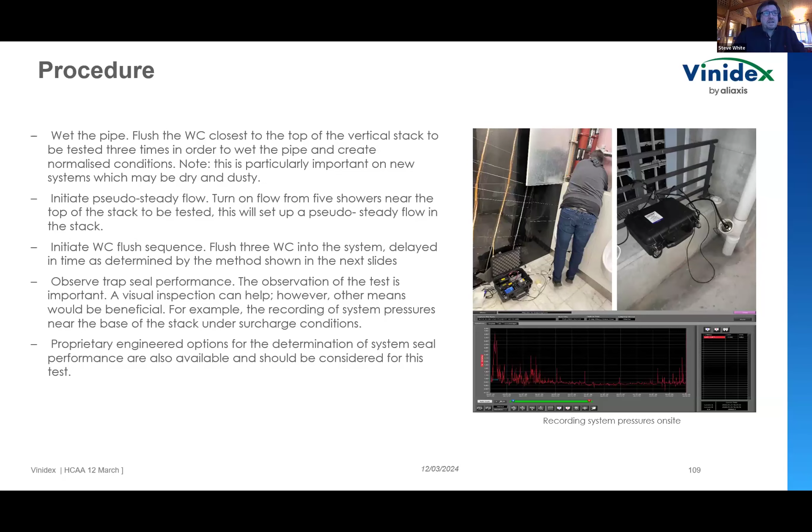So what we've got installed in the National Lift Tower is a number of systems, but essentially a 90-metre building. They've got the layout there where we've got active floors where we can discharge.

Within the system we've got traditional venting, passive venting, so we've got 100 mil stacks with 50 mil vents, 75 mil vents, 100 mil vents. We've got the RVASS system, and we have other solutions that Aliaxis have within the group. But for what we're looking at here is a typical 100 DN, 100 millimeter pipe, 110 millimeters.

We're discharging the typical design flow rates of 5.2 liters a second at the base of the stack. And why I say it's at the base of the stack is that you never get a discharge of 5.2 liters from the branches—it's the developed flow that happens at the base of the stack or an offset rollover in the system. Then we discharge the flushing by discharging 6-liter toilet flushes, and we time these flows so we can measure the peak positive pressure or the pressures in the systems at the base of the stack.

So again, testing at the same time is meaningless. We've got to develop the flow so it adds up to reach the peak flow at the base of the stack, or in a rollover or offset within the drainage system. Next slide.

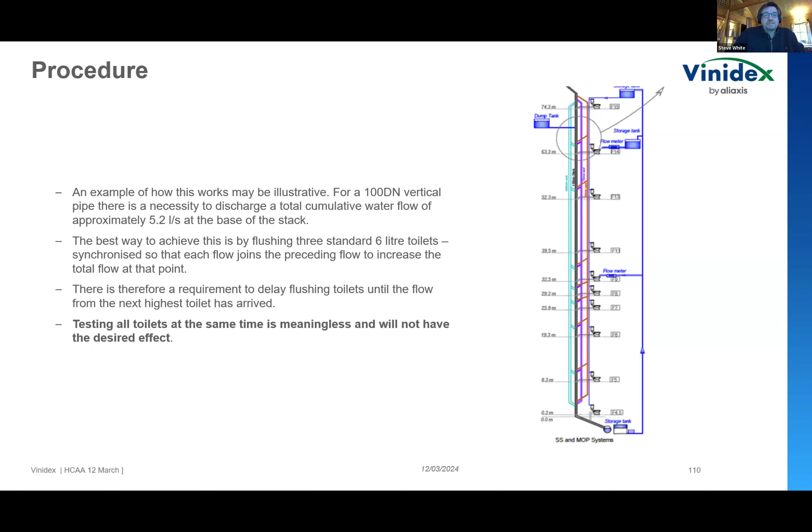So you can click the videos to get them going. Just an example there—we're quite fortunate on the tower that we can automate the flush, we've got a control system, so we don't have to have someone physically flushing the toilet. Then we can measure the discharge time, how long it takes to reach the base of the building, and the flow that happens at the base there. Then we look at the terminal velocity of the system, the time that it gets there, the total flows, and how we would design this within the system.

So every system has its own different performance curves, and you could get that calculation probably from manufacturers like ourselves. We're looking at the terminal velocity and the timing of how to lay out the system in this proposed test. We'll go to the next slide.

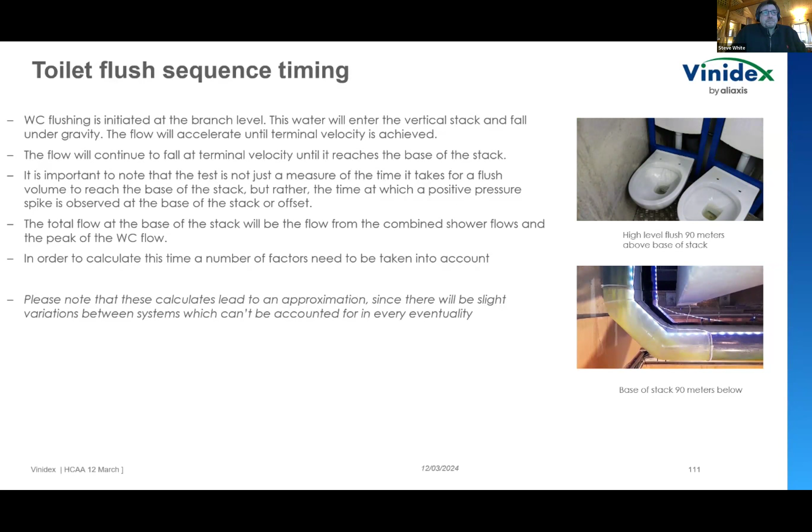So one of the important things is terminal velocity. I'm not a clever man like Brendan before—I take this from the university, and this is a long-standing calculation to understand our terminal velocities with the frictionals. This was probably looked into very much by the late Professor John Swaffield, and in academia it's pretty much standard for DWV systems as the calculation for terminal velocities.

Again, you don't really need to understand it there, but when we're looking at frictional slip, the yields in the system, we know we need to understand what the terminal velocities of each of the systems are. Next slide, please.

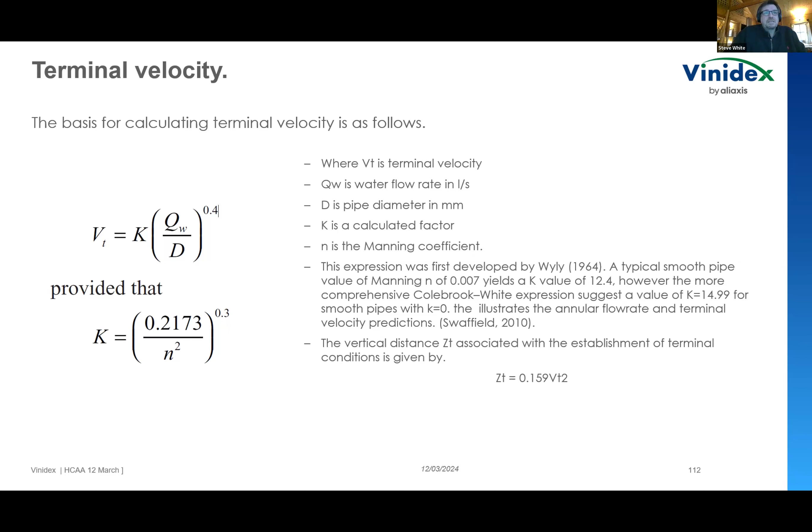So what we're looking at here is how do we work out the discharge timing and the importance of height within the drainage systems. In this example, it's just a primary vented system. We're discharging at height, in this case 75 meters above the base of the stack, and we discharge our 6-liter toilets in there, and we generate a constant flow of 2 liters a second, representing the showers there.

And the 6-liter toilets, in discharge units to the EN, works out at 1.8 liters a second, because it takes 3 seconds for the 6-liter toilet flush to discharge through the WC pan in the system. What we're seeing here is that the terminal velocity from that discharge is about 3.5 meters a second, generated in terminal distance of 1.8 meters. So literally within the discharge, if we've got a typical floor height of 3 meters, it's happening before it reaches the next connection that the waste is traveling at its terminal velocity for water.

Now, obviously, if you have solids free-falling in the middle of the pipe, they will be moving at 6 to 15 meters a second, so they always arrive at the base of the offset or the base of the stack well before the water that's there that you're discharging. But in this case, we're just looking at the water velocity there.

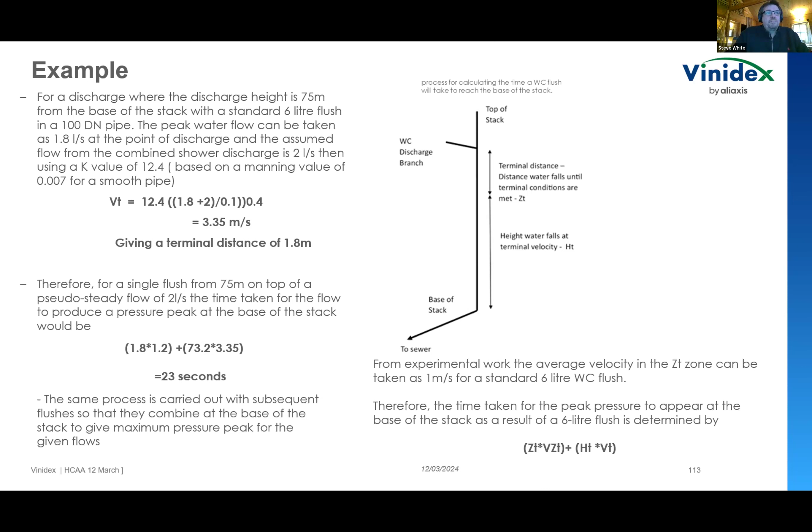So we know that at the base, we're getting the accumulated flow, in this example, 5.2 litres a second. Can we drop to the next slide?

Next slide. The timing that we're looking at is primarily influenced by the height. And again, this is where the codes don't really help us, because there isn't any stipulation on the performance of a system at height. Then we're looking at the terminal distance zones, so when it gets to terminal velocity, and the discharge points that we're looking at.

The delay between the flushes is a difference calculation, and the travel time. There's a little bit of work, but once you've done it a couple of times, you start to build up when you need to start discharging the systems. What we're looking at for the second flush in this example was 50 meters, so 25 meters below. It would take 15 seconds to reach the base of the stack. And therefore, we're looking at the velocities plus the terminal distances, and then the increase in velocity because we've got the discharge from above and the discharge below.

And therefore, in this example, what we're doing is discharging the second WC 8 seconds after the first WC. So we're generating that flow of the unsteady flow with the 2 litre continuous flow that we're generating from the steady state flow in the system. Next slide.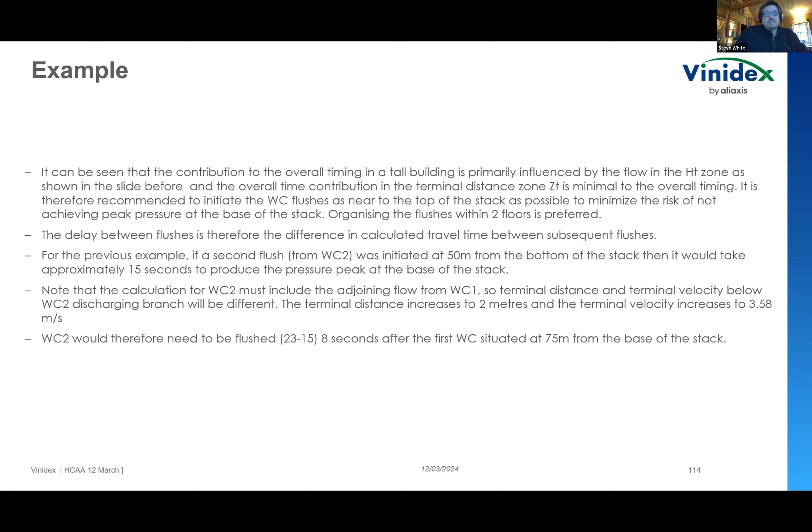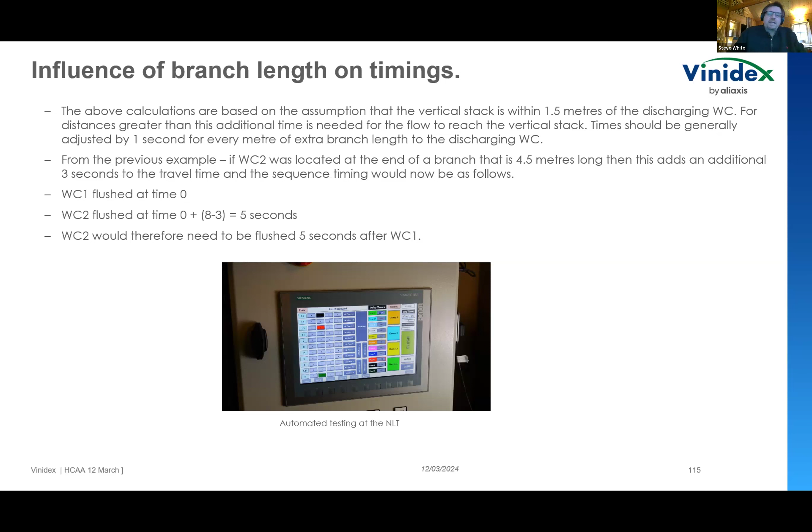So the way that we do that, and we're quite fortunate, we've got a bespoke control system at the NLT, but if you're doing it on site, you just do it with a couple of colleagues and say, go on the radio to flush. So we flush WC1 at the start, and that's got the 2 litre a second flow rate going through that. Then we do the second discharge 5 seconds after that - so we flush the WC at point 0, and then 5 seconds after that we do the next WC, and that generates the flow rate that we're looking at for the generation at the base of the stack. So if you have longer branches, you'd have to do a calculation of the branch lengths so you can get the timing right. Let's go again for next slide.

So the pass criteria is what we're looking at. I know that in the latest NCC, you've got a pressure requirement that you need to look at, but there isn't a recommendation of how you measure that pressure. So again, this test could be helping the NCC recommendation on measuring the pressure levels. But what we need to know is that the pressure doesn't ever exceed 375 pascals, because if you get more than 375 pascals of pressure, air will start passing through water trap seals.

So on the left, we've got the induced siphonage - the air bubbles are going through the trap because it's going over 375 pascals, trapping the water and sucking it out. In the middle here, we've just got a toilet that's seeing the effects of the offset and the base of the stacks. And then on the right, we've got the positive transient, again exceeding 375 pascals, where the air is coming from the system side to the living space.

So you can monitor the trap performance by visual inspection, or you can use pressure transducers to actually measure the pressure as well. Then obviously after the system test, what you don't want to see is a loss of trap seal. So you don't want to lose more than 25% of the trap seal, or you start reducing the performance and the barrier that water trap seals provide.

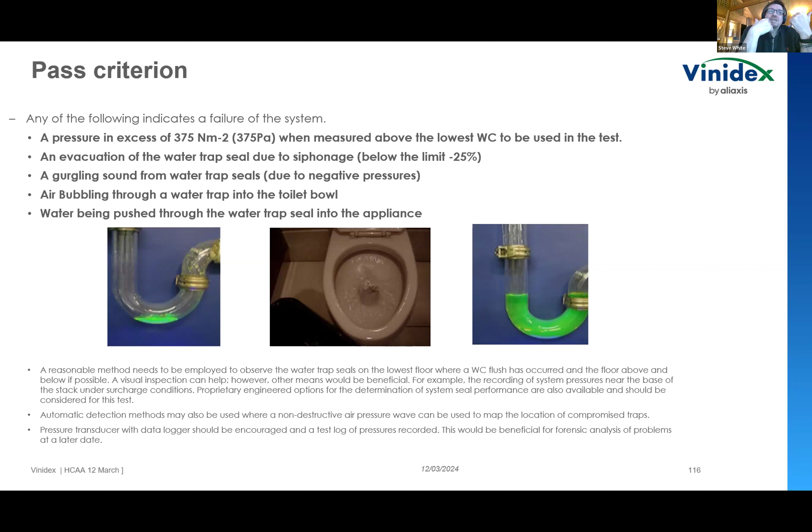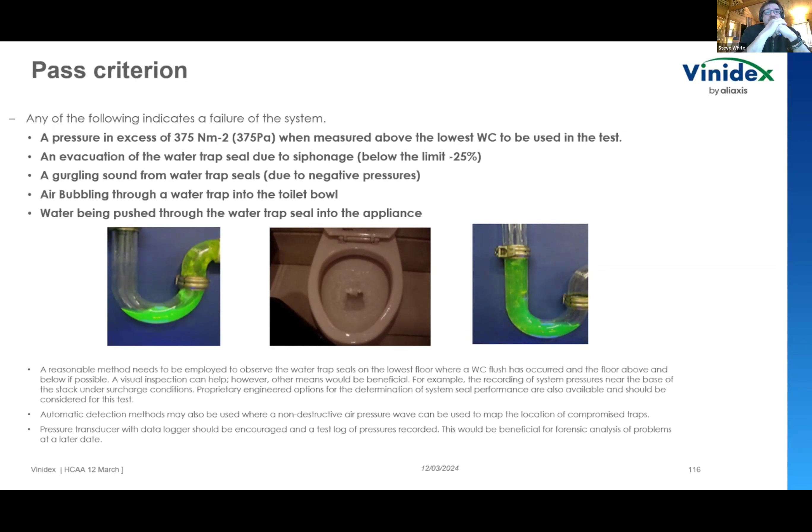Or sometimes you can see it and hear it as well, where you can get gurgling, typically in floor traps, due to negative pressure, or air bubbling - that could be the positive pressure. So it's not always losing the trap seal, but you're breaching the trap seals. So again, the trap movement is an indication of pressure, but a better way to look at it is to actually use pressure sensors that you retrofit onto the system.

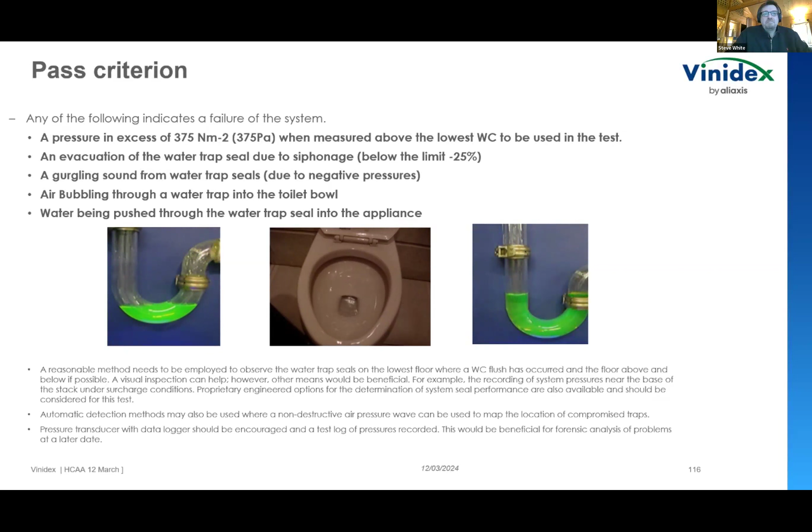Next slide. So what we've done here is rig up the RVASS system, and we've done the testing with a PRL and without a PRL. So floor 15 is actually the elevator floor at the top, on the top left hand picture, which is 90 meters above. And then floor 14 is where we're discharging through the bucket here to generate our 1.7 litre a second flow rate in this example, to get our example of 15 showers running continuously.

If you were doing on site, you would just put the 15 showers, the 5 showers on running, and the bottom left hand toilet is the next WC that we're flowing, and then the discharge at the base of the stack. So if you can just play the video again, because it's all timed.

So we discharge the uppermost toilet. We start our 1.7 litre per second flow rate. Once that's generating at 2 litres a second, we discharge the first WC, then the second WC, and then we can see that all that water will be at the base of the stack. That gives us our flow rate that we're looking at here.

And because RVASS is slightly different than straight pipes, we have a slightly different timing for the system. So the velocity in the RVASS system, our measured terminal velocity, was 2.7 meters a second instead of 3.8 meters a second if we had an equivalent straight pipe, because of the offset nature through the RVASS fitting.

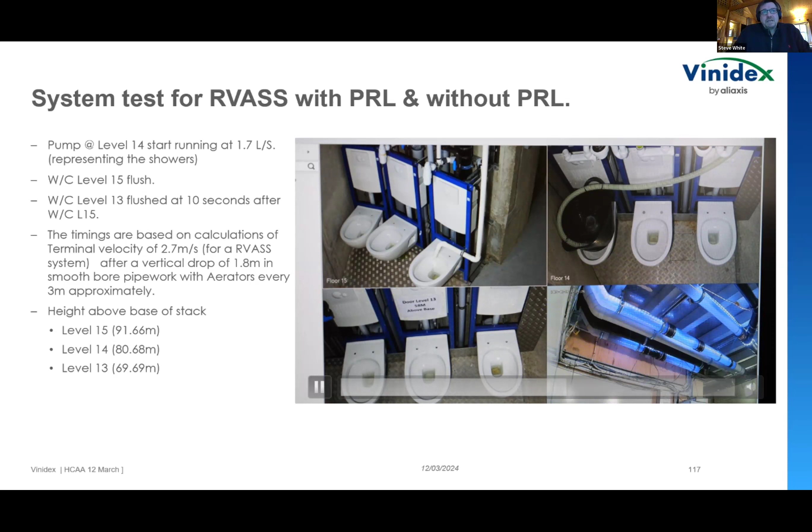So what does that look like when we're measuring with pressure meters at the base of the stack? For the discharge that we did, we actually were quite surprised with the results. You can play the videos, Chris. We're looking at the pressure regime.

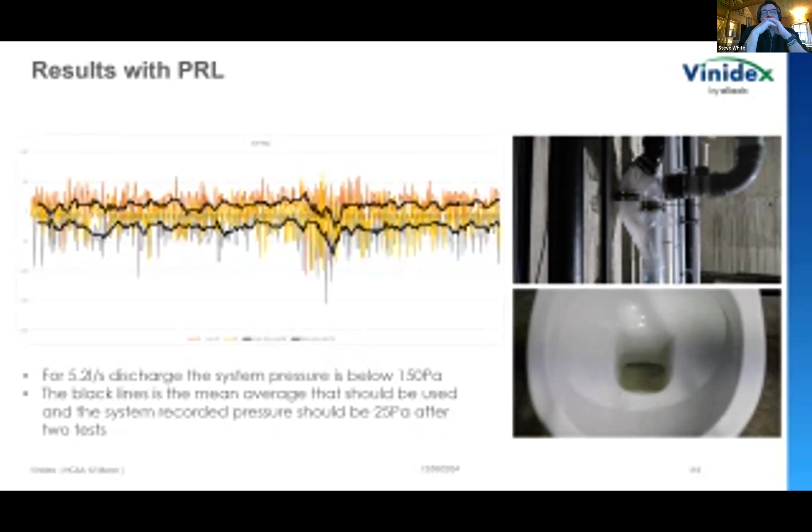So the criteria is that we don't want to be above 375 pascals plus or minus. When we did the system test here, you can see the flow of water that we're discharging through. We were only getting plus or minus 25 pascals of pressure, so well below that threshold where system pressure would affect the water trap seals.

And that's with a PRL. You can see the orange, yellow and gray lines - those were 3 tests that we did. So we repeated the tests and averaged it out, and the average is what gives you the system performance, because you will get spikes.

We can see the gray line about halfway through, exceeding 150 pascals, but that is very, very short - essentially milliseconds - and it doesn't actually affect the trap seals. So it's the average, and this is the advantage of using pressure sensors to gauge system performance versus a visual inspection.

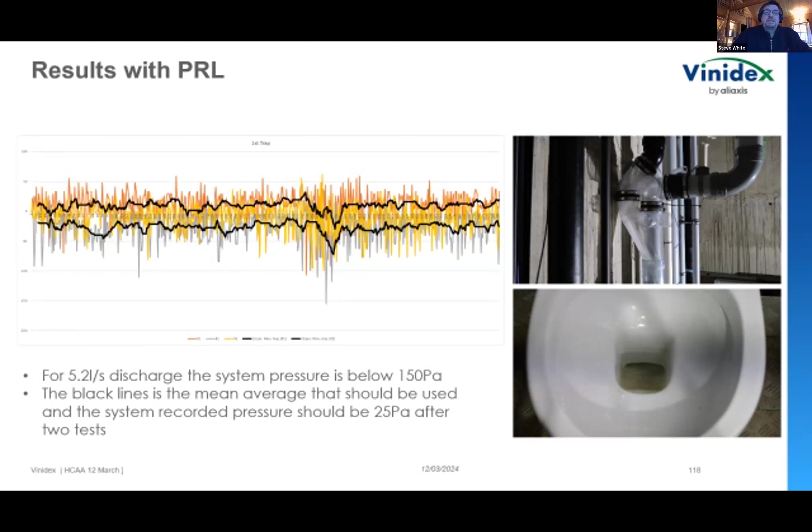If we do the next slide, we did the same test and we removed the PRL, and the PRL, just to clarify, was the same size as the stack - so it was a 110 millimeter PRL.

And what we can see, although the system performance is passing the criteria for 5.2 liters a second, it did have an impact by removing the PRL at the base of the stack. If we had increasing flow rates above 5.2 liters a second, you could see that error could come to the point where you'd get to the failure point. And primarily that's because a pressure relief line reduces the pressure around the base of the stack due to the turbulent flow, and also on the offset.

So the PRLs - even with this 5.2 liters a second flow rate, having it and not having it has an impact on the design. So we're working further on making the procedure more user friendly for contractors.

We'll give tables with baseline terminal velocities for the different systems and for different sizing, because obviously if you have a 60 millimeter pipe, your loadings are higher, your terminal velocities will be increased because of the lower pressures in the pipe. So it would go from 3.8 meters a second to probably 6 to 6.8 meters a second - your terminal velocities will increase. So we'll look to give a base guide and how to do the calculations.